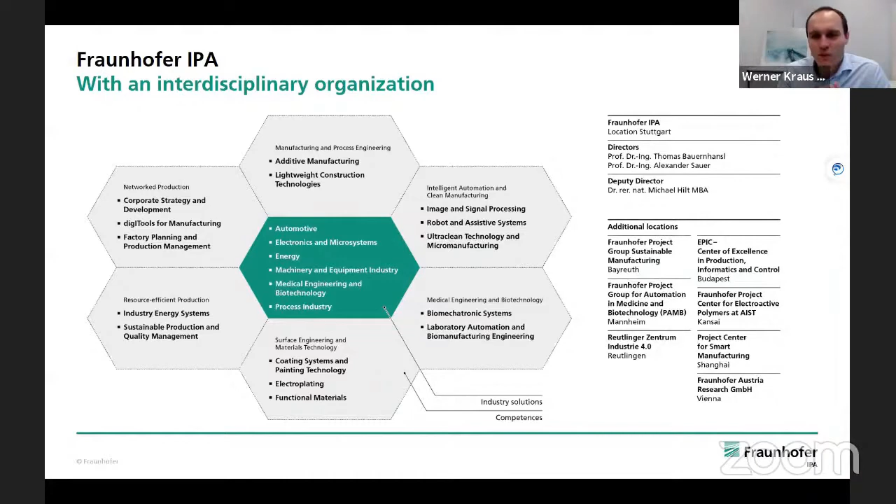In our department, we have 70 researchers. In robotics itself, we have around 150 full-time researchers working in all kinds of robotics. Our robotics department is busy in 7 groups. We are doing handling, intralogistics, which is focusing on bin picking since 20 years, welding and machining for SMEs, assembly automation. You know the video from the video competition of a dual arm robot for automated wiring. Then also lots of planning and development of robot systems.

In the area of service robotics, we are focusing on navigation of autonomous mobile robots in the group of professional service robots. Then we have the long history of the Care-O-bot in the group of household and assistive robotics. Of course, then software engineering and systems integration, which is responsible for ROS Industrial. And we have a modular system for service robot technologies, which focuses on perception, grasp planning, navigation, action recognition, and so on.

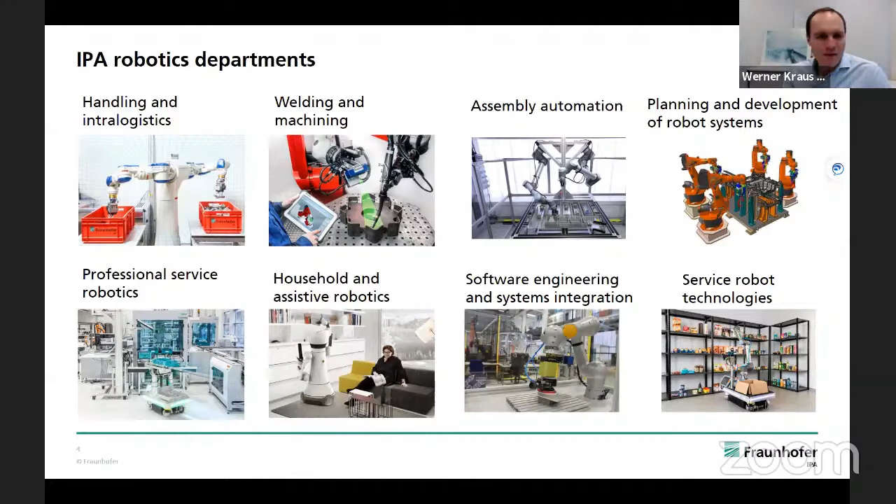To give you a vision of our industrial robotics activities, we say automation of automation. In the last years, the efforts for integration and reconfiguration rose exponentially due to the individualization of products as a megatrend of our society and production, Industry 4.0. And till today, the robot investment is only 25 to 30% of a robot system. Around 40% of the investment in robot systems are personnel costs. And although robots became cheaper and cheaper, these scale effects are compensated by the individualization of the production system.

Furthermore, this automation is often introduced into brownfield applications, so into areas which are designed for humans, not for robots actually, which again contributes to integration efforts. And also when it comes to reconfiguration, experts are needed to change the production system. And this is the motivation to talk about automation of automation, to say, okay, we have the automation system understood quite well, but all the tasks around the automation system are subject to be automated to lower integration and reconfiguration efforts.

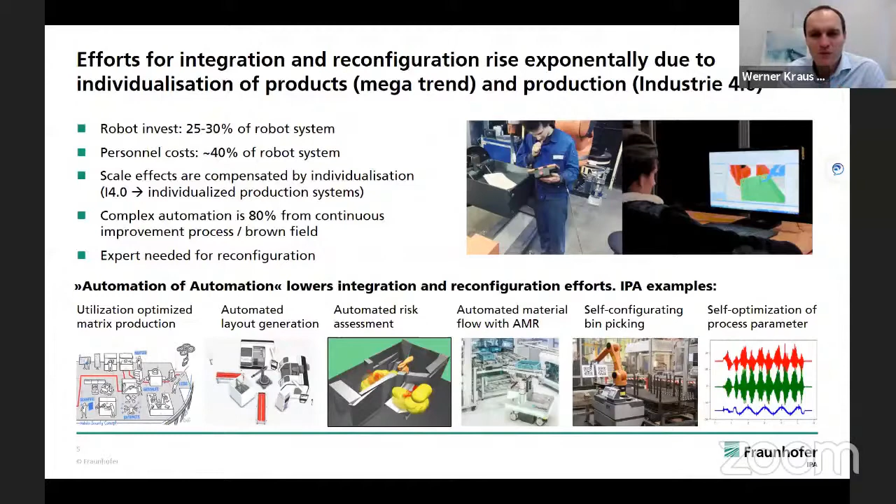Now I jump into our IFR statistics. When we are looking into the application fields of industrial robotics in 2019, the picture is almost like in the last years. So almost 50% of the robots are performing handling tasks. So pick and place, sorting, palletizing, depalletizing, and these are always stationary robots. So typical industrial robots. Then around 10% of the robots are working in clean room environments.

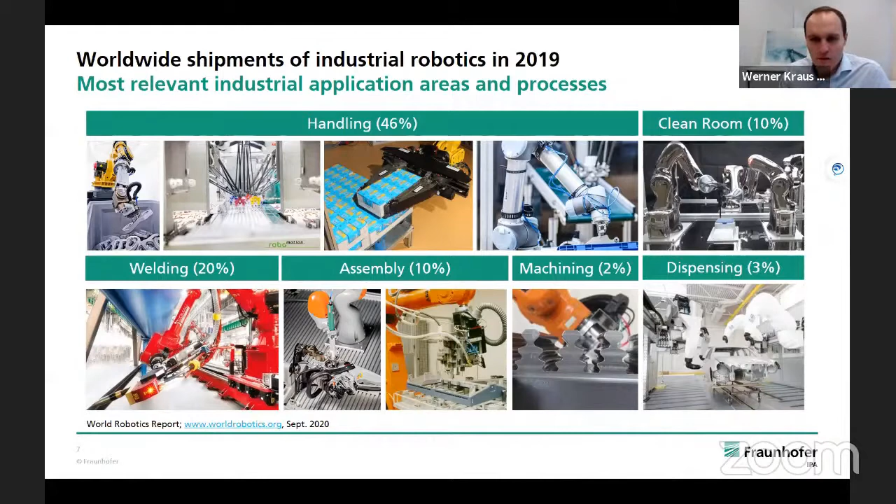20% is welding. Assembly is again 10%, so quite poor actually. There's a lot of high potential to be automated in the future. And the niches, machining and dispensing. So that is as usual, I would say.

When we are looking at the sales numbers, we see that after the peak in 2018 with 411,000 newly installed robots, the economic slowdown impacts industrial robot sales. So last year, only 390,000 new industrial robots were installed worldwide. We have overall now an operating stock of 2.7 million robots.

In these 390,000 robots, this includes 18,000 cobots actually. So 4.7% of the industrial robots are cobots. I just heard yesterday that Universal Robots delivered the 50,000th Universal Robot, and this is one of the market champions in the field of cobots, which is also reflected in this study.

Good. When we are looking into the robot density, which is the relation between number of robots to number of employees in automotive and non-automotive, we see increasing numbers. For example, Korea has now 2,500 robots per 10,000 employees, which is top one. Worldwide average density is 113 robots. In Europe, we are in the middle, and China targets a density of 150 robots per 10,000 employees.

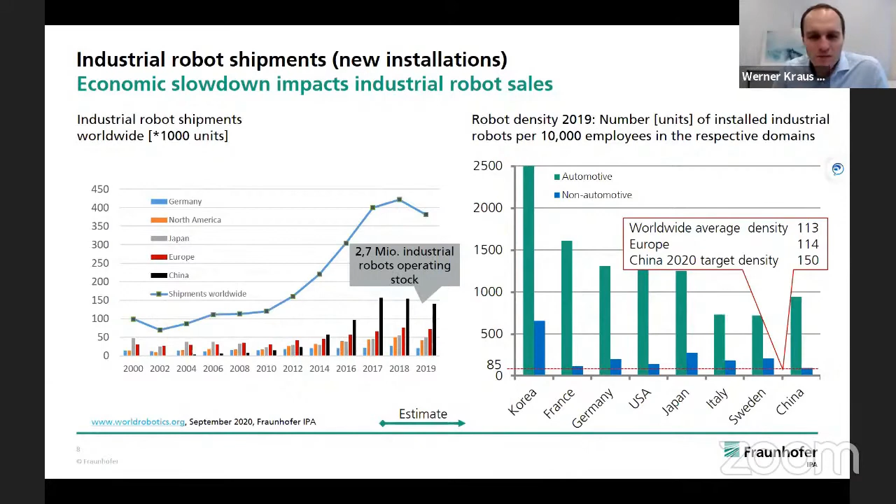When we are looking into the financial view on robot industries, we have industrial robotics and service robotics. The industrial robotics market is $13.8 billion in 2019. This turnover is performed by around 80 industrial robot manufacturers worldwide. Then we have on top the system integration, which is almost double the size of the robot market itself. So it's again $28 billion.

So in the end, we talk about a market in the size of 40 to 50 billion for the total industrial robotics industry. Actually, the market grew quite well in the last years, around 11% annually. And also robots became much cheaper. For example, within 7 years, the price dropped from 53,000 US dollars to 37,000 in 2019.

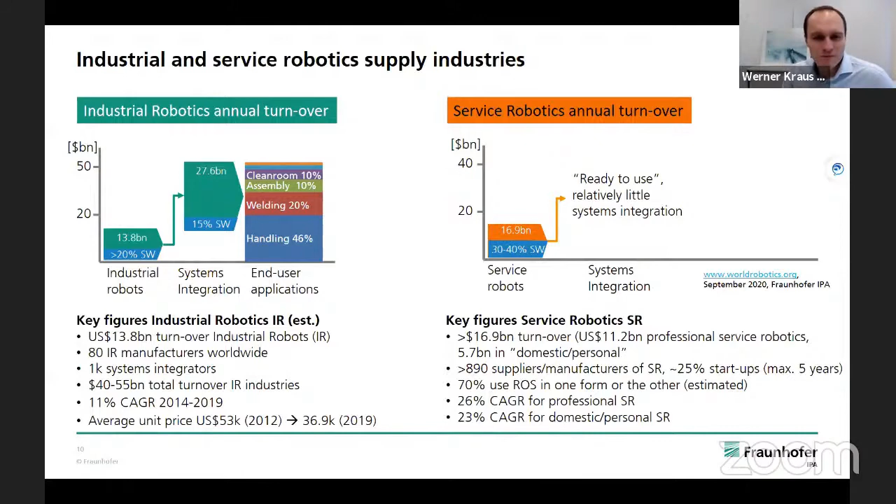So this is our application wall, part 1 for professional use. Evergreen applications are milking robots for agriculture. Lots of research is going on for the introduction of robots in the field. Then we have robots for cleaning, which got a strong boost due to disinfection robots. So we expect strong growth in this area. And it shows that the service robotics market is really diverse.

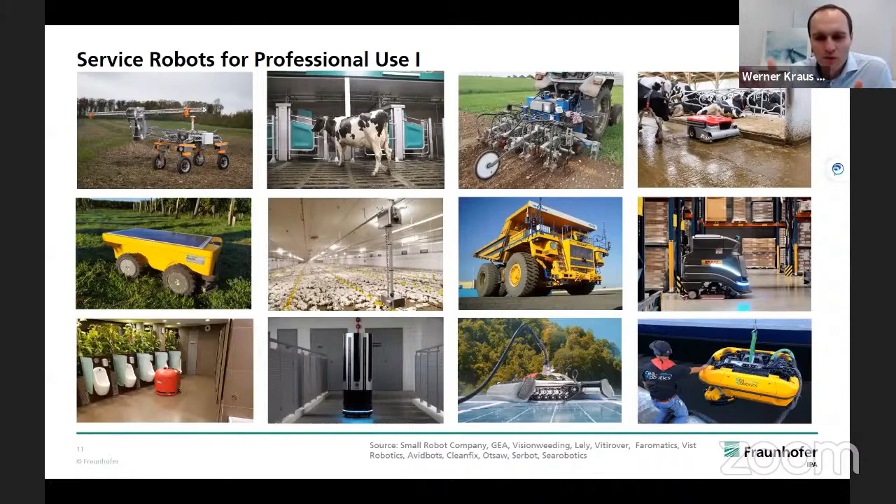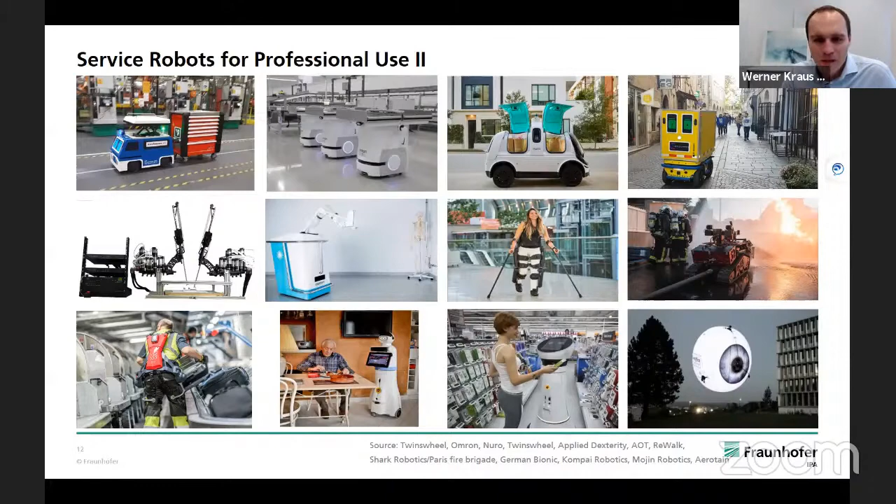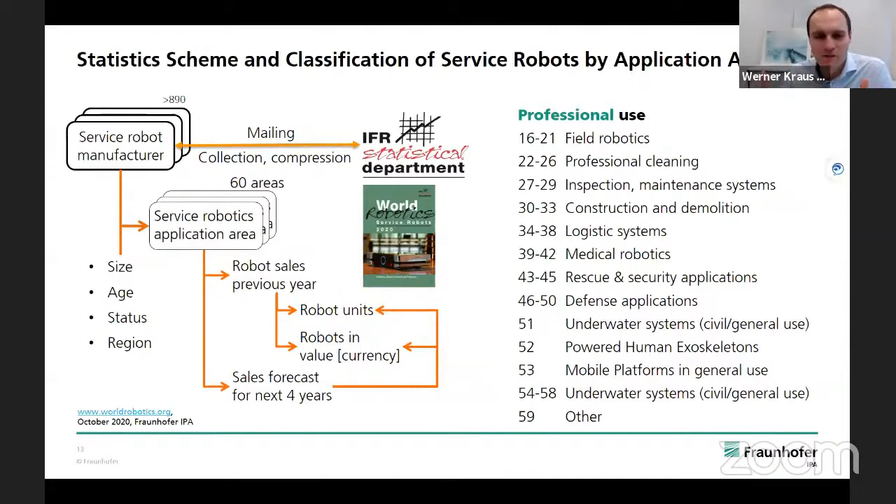So for our statistics, we have this workflow that the IFR contacts the service robot manufacturers and asks them for the current sales numbers and the expected sales numbers in the next years in the respective domains of applications. So today we have around 60 application areas. We are revising the structure these days to get it more condensed, to make it also easier for the companies to submit figures. And if you are a service robot manufacturer, we are really happy if you support our study by providing market figures, because this is the base for our statistic.

Good. When we are looking into the main application areas, we see the mentioned strong growth rate. Actually, the medical robots market is the largest one from a financial view, because the robots are really expensive. From the numbers view, logistics robots are dramatically larger than medical robots. And we see here also the strong growth rate from 0.9 to 1.9 billion US dollars from 18 to 19, which corresponds to a growth rate of 110%. Then we have defense applications. Field robots is quite stable.

There's also one thing happening in the market, that robot as a service becomes an important business model. And we are asking our companies about robot sales and also turnover with robot as a service, actually. And there are companies in the market which make 80% of the turnover with robot as a service. So this becomes more and more important, especially in the area of mobile robotics, where the integration costs are quite low and a high demand for flexibility exists.

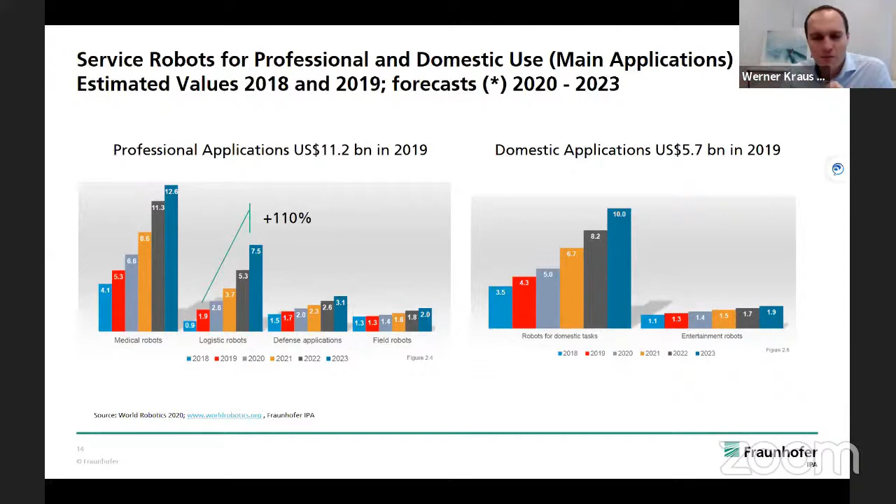In the domestic application market, which is, for example, vacuum cleaners for home, lawn mowers, window cleaning, we have also strong growth. And there's also a high demand from the market for more and more intelligent robots. Good. When we are putting this together, we can look back to a really strong growth in both the professional and domestic service robotics market.

When we are looking on the right at the market structure, actually half of the manufacturers of service robots are located in Europe. Then in the United States, Russian Federation, and not that much actually in China. So in the end, we also see that service robotics manufacturing is a startup business. So every fifth company is younger than 5 years. And in summary, we have 890 service robot manufacturers.

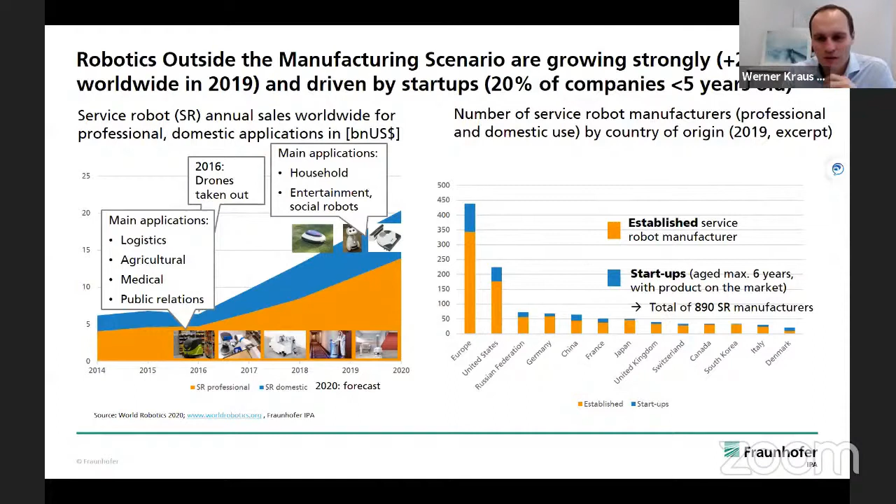Good. Looking into the business sizes, this also shows that service robotics is a subject of smaller companies. You see it here, business size. So most service robot manufacturers have less than 200 employees. So it's really always a company which targets a niche, develops a system which solves specific tasks of the customers. And this is really special in service robotics.

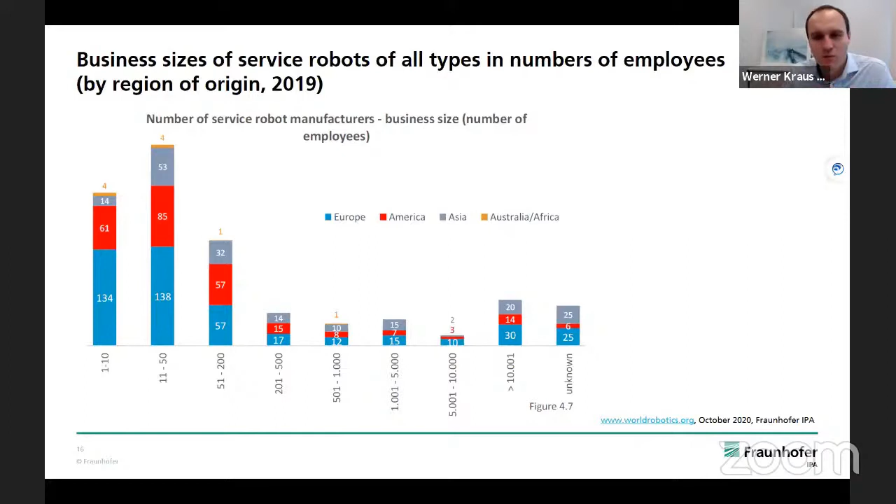Next year, the award ceremony will be during the virtual European Robotics Forum, which will take place in the second half of April. And I'm looking forward to receiving your applications until 29th January. And it would be a pleasure to have applications from the ROS-Industrial Consortium.

So good morning, everyone, and thank you for joining this session today, which will cover updates from the Asia-Pacific side of the ROS Industrial Consortium. ROS Industrial Consortium Asia-Pacific is operated by the Singapore Agency for Science, Technology and Research, Advanced Remanufacturing and Technology Center, from where I operate as well, and our team here with ROS Industrial Asia-Pacific.

For those of you who are not previously familiar with us, we're a leading public-private partnership research institute for advanced remanufacturing and manufacturing technologies here in the Asia-Pacific region. We work very closely with our industry partners to develop new technologies for industry adoption, which includes robotics, one of the main technology pillars of our center, which is also why we have a significant interest in ROS and open source robotics as well.

ARTC is heavily focused on applied research or adaptation of technologies that can be directly leveraged into industry, as well as bridging the so-called valley of death, or technology readiness levels 4 to 7, if you're familiar with the TRL levels. So this is a common challenge, to bridge and move forward early research activities into something that has the process capability, performance, and robustness to operate successfully in production or industrial settings.

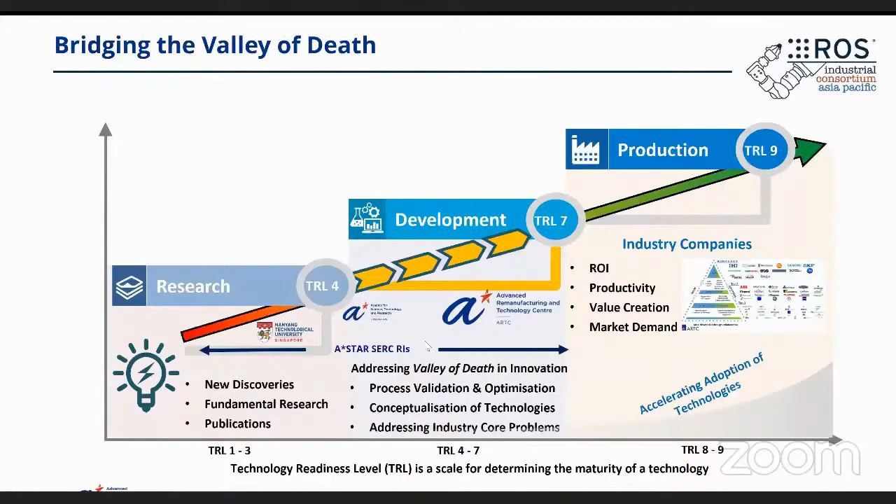So with that, I'll share a bit more about some of the ROS-based activities that we have been focusing on here throughout the year. I'll share in a little while a bit more about some of the technology developments and consortium activities that we have been engaged with. But I'll start off quickly today to talk about some of our efforts related to enabling easier and more consistent industry-grade quality for ROS-based components.

The global ROS community has been actively engaged in deriving what is known as the ROS Enhancement Proposal 2004 this year, or REP 2004 for short, which is an effort to derive a set of quality process and metrics for ROS packages. And this is really beneficial both for package maintainers as well as users that are looking at adopting these technology packages, as it provides more coherent guidelines and makes it easier to both improve on and also assess the quality of a given package compared to the ROS platform overall.

Many of the categories in REP 2004 that have been defined are quite process-oriented. These can include things such as versioning policies, change control process, and so on. Traditionally, one of the very time-consuming steps related to ensuring quality is actually performing testing and validation itself. And one of the questions that we asked ourselves is, could we fully automate REP 2004 testing criteria to allow the current state of a package to automatically report the quality level according to these new guidelines?

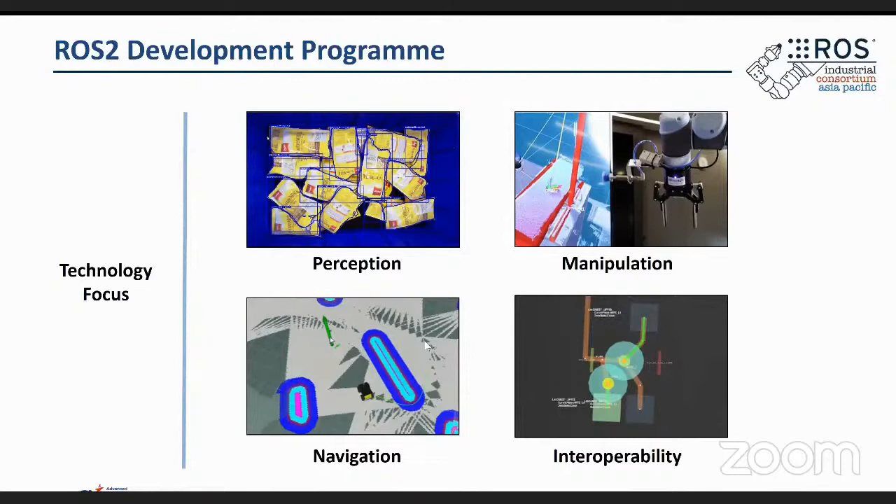So in the spirit of providing industry quality ROS 2 components that are easy to deploy, the package Easy Perception Deployment provides robotic vision capabilities that can leverage state-of-the-art machine learning models. This package provides ready capabilities to perform object segmentation, localization, measurement, and tracking, and comes with a user interface that makes it very fast to train and deploy, even if you're not an expert in machine learning frameworks or up to speed on the latest algorithm to use.

It also leverages the open standard ONNX format for deployment of machine learning models. So it will be straightforward for users that would like to import other models or plug in new high-performing models over time as they become available, rather than fixing the package to only work with a specific model, which would require a bit more replumbing and customization to import other models in the future.

So here's a quick example of what the package looks like in action, performing object segmentation, as well as determining the main axis of the object, which may be useful for grasping. A performance benchmark on our reference system shows similar performance in terms of speed as compared to YOLACT ROS, but a slightly higher accuracy score for this specific model use.

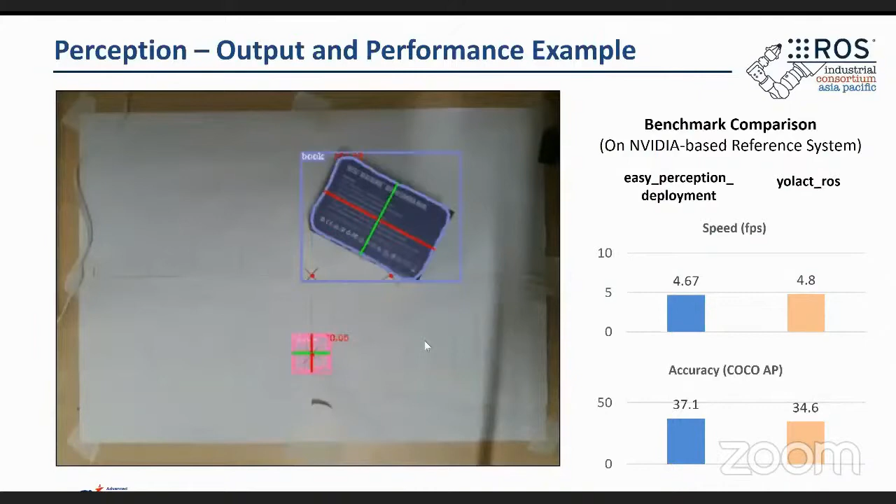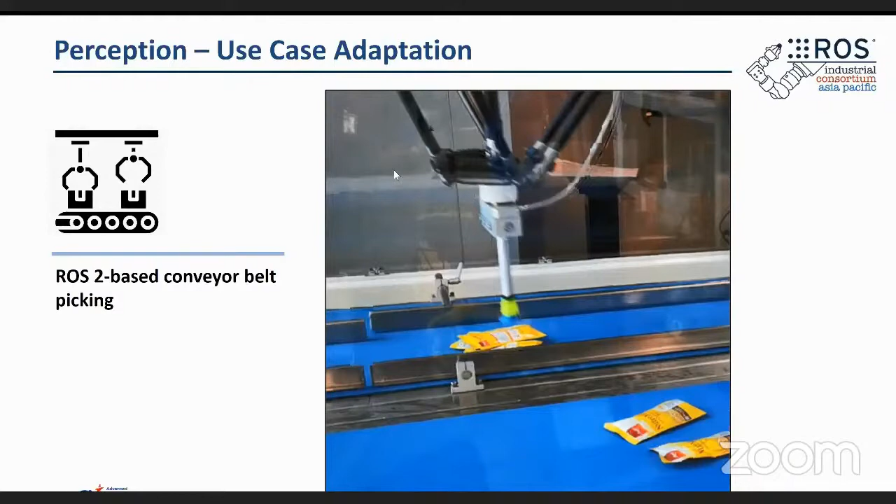Okay, so here's a quick demonstration of how this package looks in action. So this is Easy Perception Deployment plugged into a pure ROS 2 based system to perform conveyor belt picking, where we have a native or a very lean ROS 2 driver driving a Delta robot to work in conjunction with the Easy Perception Deployment package as well.

I'll share a bit more about our beta releases of the package that are currently available, as well as our planned upcoming releases and features. The beta version was open sourced in September. That included the user interface for configuration and training, ONNX support, and object detection and segmentation. We have just added additional feature support on top of that to perform automatic object measurement, rotation, and localization that is suitable for grasping related tasks.

By the middle of next year, we're planning for a formally validated drop that includes object tracking capabilities, as well as robust and optimized performance for the full pipeline, which will be our first production release of this package.

Easy Perception Deployment is available in our ROS-Industrial GitHub, and you may access it directly through the links provided here in this slide. It can also be leveraged directly for commercial applications, of course, based on its business-friendly Apache license, which is commonly adopted for ROS platform components and packages as well, which we're following.

The second ROS 2 package I will share with you today is called Easy Manipulation Deployment and provides fast grasp planning capabilities, and is intended to flexibly support a range of different types of grippers. This package provides three main capabilities. First, it provides a Workcell Builder user interface that makes it quick and intuitive to create a Workcell representation. Secondly, it provides a grasp planner with a key design intent to be a fast planner that can determine a suitable grasp location flexibly for a range of different end effector hardware architectures, which I'll talk more about in a second.

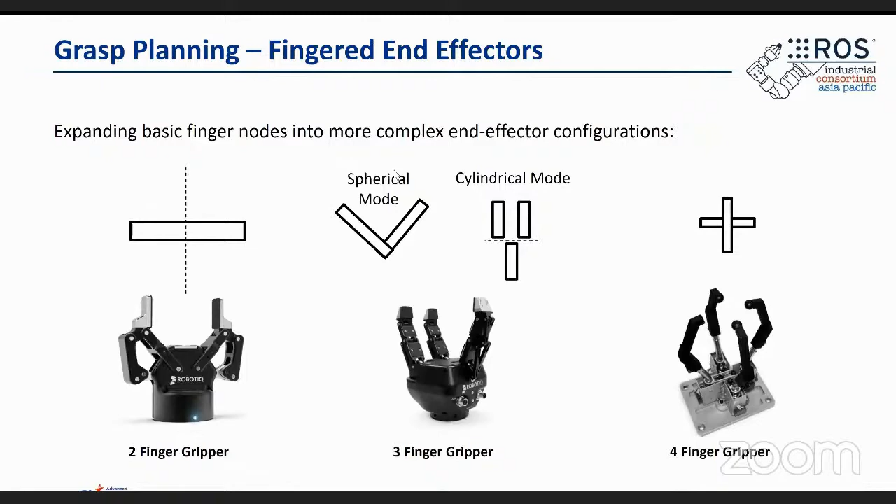Similarly, the second main set of commonly used industrial end effectors that we wanted to support is various types of vacuum end effectors. So in a similar approach as the finger-based architecture, the grasp planning library would support combinations of a basic representation of a single suction cup to represent these various types of common, or customized for that matter, suction cup arrays of various forms.

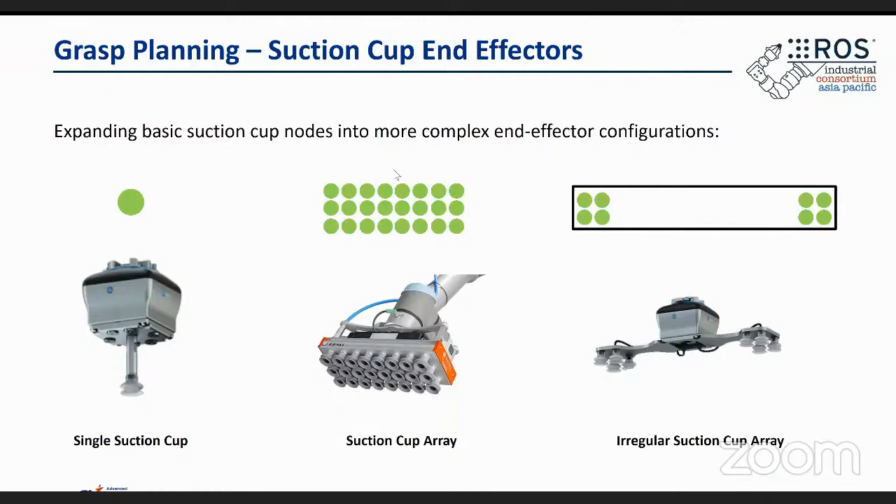We've conducted some early sanity testing on grasp planning capabilities using a reference two-finger gripper configuration for a set of objects with a variation in size, height, and shape with successful results so far. And we will be conducting more extensive testing and expanding on these test scenarios also for other gripper combinations in the first half of 2021.

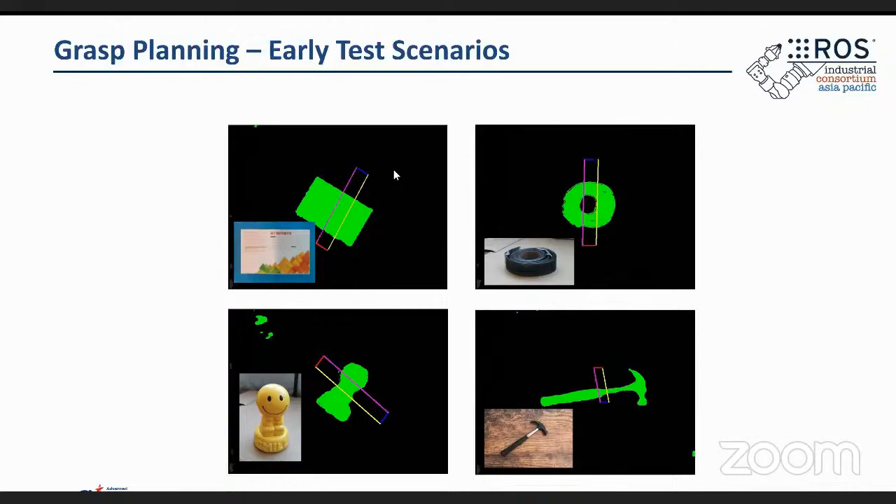Although this package is still in alpha stage, early limited performance tests the team has conducted on a single CPU core without GPU acceleration show that grasp planning times are already relatively fast for a two-finger gripper configuration, while we still have a fair amount of opportunity to further conduct performance optimization at a later stage in development of this package.

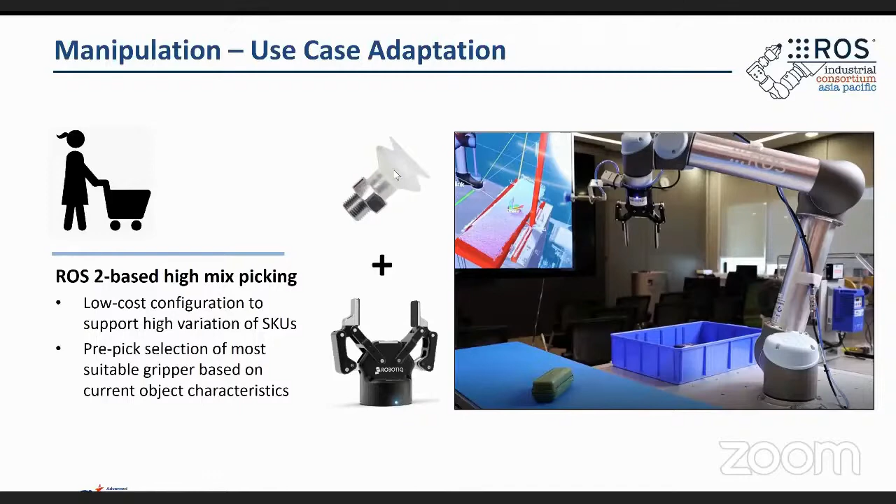And in addition, as mentioned, the easy manipulation package does not require training, so it can flexibly support different physical constraints and parameterization of your gripper configuration out of the box. To illustrate one example of how Easy Manipulation Deployment with some customization could be used for more complex setups than just a single gripper configuration: with fast computation of suitable grasps for more than one gripper type, multiple grippers could be deployed to a single robot to create a low-cost picking system that is able to serve high-mix applications more easily at lower cost.

So we are currently publishing the first alpha release of Easy Manipulation Deployment that will be available within the next week or so, by the end of this year. This alpha release will include the Workcell builder user interface, as well as the manipulation pipeline with support for two-finger gripper, as well as single suction cup gripper architectures. By the middle of next year, we're planning for a full formal release that has wider support for various industrial grippers, collision avoidance, as well as further robustness and performance optimization of the package.

So the alpha version of Easy Manipulation Deployment will be made available in our ROS Industrial GitHub as well. And if you're interested in testing this package or have a specific or interesting use case for this that you want to explore, feel free to reach out to us, and we're happy to share more details about some of the current capabilities or also limitations and constraints given the current state of the alpha release package that we have available.

So with that, I'll move over to some quick updates on the ROS Industrial Consortium activities that we have here within the Asia Pacific region. Of course, as part of the consortium activities, we perform a wide range of different types of outreach activities, promoting ROS-based technologies, sharing information about ROS to industrial companies on how it can be adopted, as well as providing regular training sessions for ROS for industrial applications.